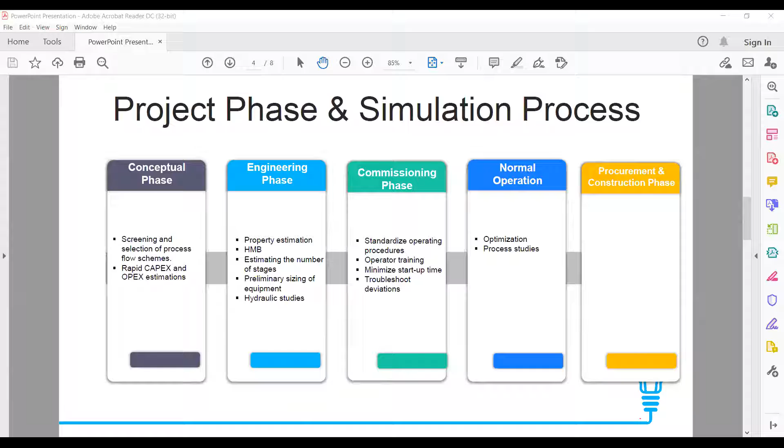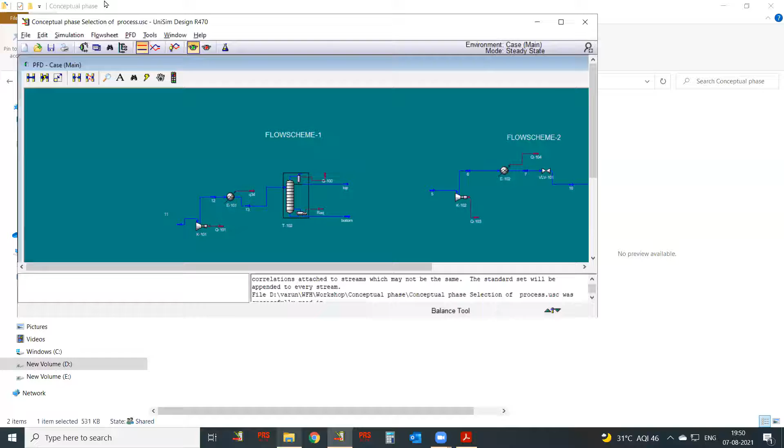So in the conceptual phase, it really helps. Actually, what I want to insist is throughout the lifetime of a project, the process simulation helps us. So right now we'll see one application for a conceptual phase. Yes.

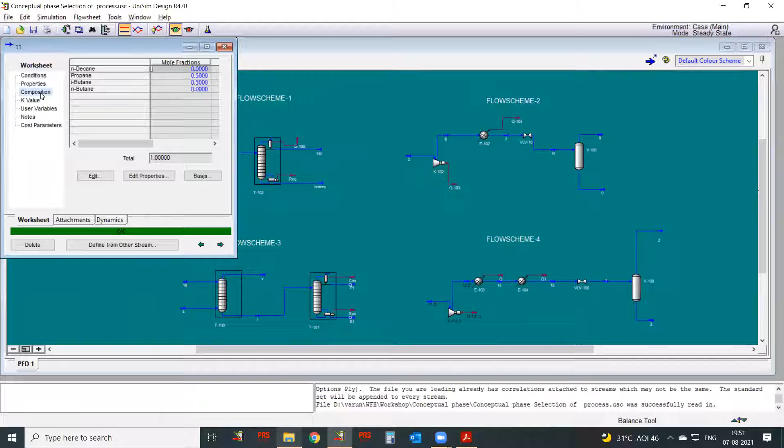So we have a propane and iButane stream, and probably you want to make it better. You want to make a stream that is say 70% of propane, split it. So we have 4 different flow schemes. So one is compressor, a cooler, put it in a distillation column, separate the propane and the butane streams.

The other one, you have a compressor, a cooler, and an expansion valve, put it in a separator and split the streams. Flow scheme 3, we have an absorber. We can absorb the butane selectively using some absorption media, some solvent, and then separate the solvent, purify it and recycle it back and recover the propane part.

Or flow scheme 4, you do the cooling in 2 stages. So one at a higher temperature, the other one at a much lower temperature, again taking it back and splitting it in a separator. So we have 4 different flow schemes. So which one is better? So from a capex perspective, from an opex perspective, we can do an analysis of the utility cost, the sizes of equipment, and decide on which flow scheme would help us better.

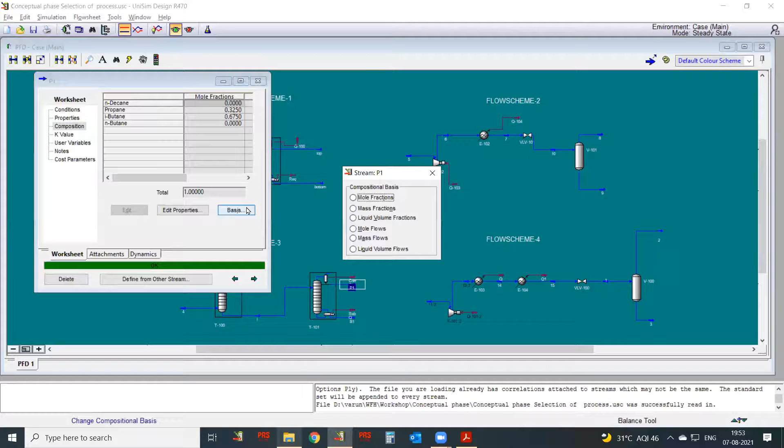So each one will have a different capital cost, different operating cost, and sometimes different purities as well. For example, in this scheme, you get about on a mass basis 66% of propane. This will be much better, I believe. No, not really. This, yeah, the same 66%. 67. So small changes in composition, but the equipment configuration is different.

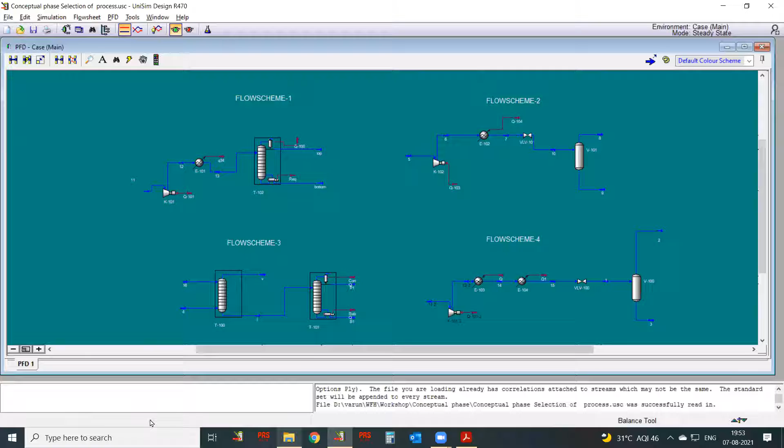So in a conceptual phase, chemical engineers face situations like this. So we can really use the process simulation tool to help us to find out which flow scheme would be a better choice. So this is about the conceptual phase application. During the engineering phase, we face even more challenges. The engineering phase is where the process simulation tool is put to its maximum use, or we derive the maximum benefit.

So first one is the property estimation. As you all know, if the properties are right, the sizings are right. So the correct properties will give us the better sizing and accurate performance. In the engineering phase, it's rather difficult to estimate properties from lab data or retrieve it from standard textbooks or data books. So process simulation software can find out properties at different pressure temperature conditions using different thermodynamic models, and those numbers are pretty accurate.

Let's see one application for that. Let's work on a water stream. Certain properties are quite clear. We might know them, right? So we're talking about water at 30 degrees and a pressure of 2 bar. So here we get a lot of properties. So right from densities, enthalpy values, heat capacity values, viscosity values. So you get a lot of properties for pure components.

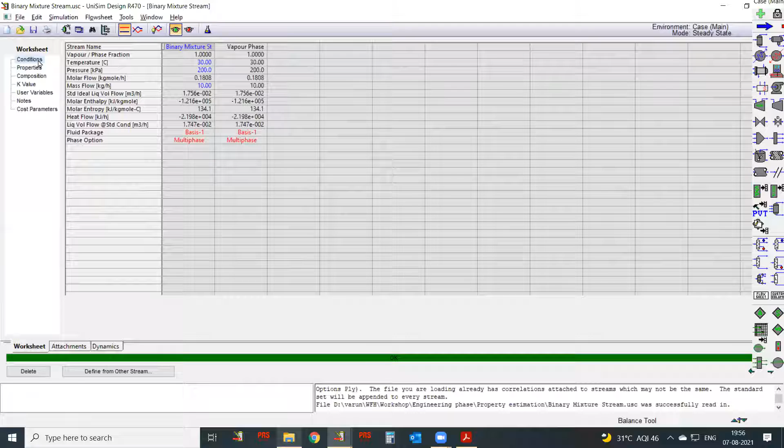So these are very authentic data which can be used for the sizing of equipment or when you are doing a calculation. So when we have mixtures to handle, this is a stream of propane and butane. When you handle mixtures, properties are even tougher to calculate, but the software does it with much ease, and the numbers are again authentic and accurate.

And then sometimes we might have situations where we do not know the composition, say like crude oil. We do not know what components are there, or even with vegetable oil. So when we do not know the components, the software gives us an option to simulate the stream using hypo components. So in this case, it blends a lot of hypo components, resulting in whatever parameters that we plug in when we... one second.

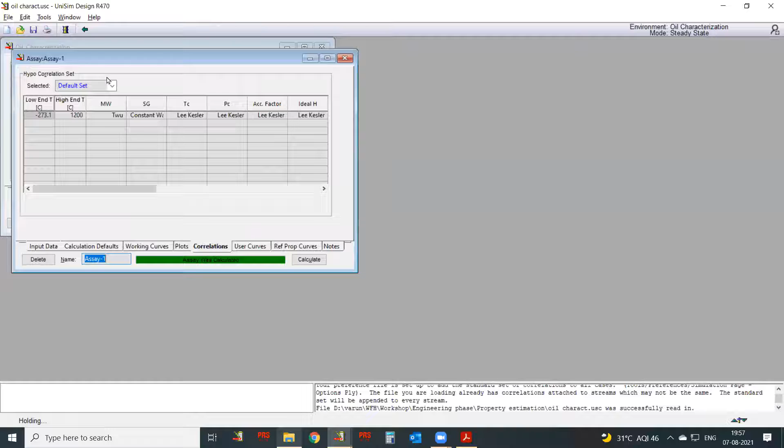The bulk properties we try to match. Say I know the crude oil has a molecular weight of 300, density of 783.3. I know certain viscosity data, and then I know the light end composition, because these are easier to determine in the laboratory. So with these minimal data, we can really create an assay, which means the assay is a lot of hypocomponents put together, but put together, they meet the input that we have given.

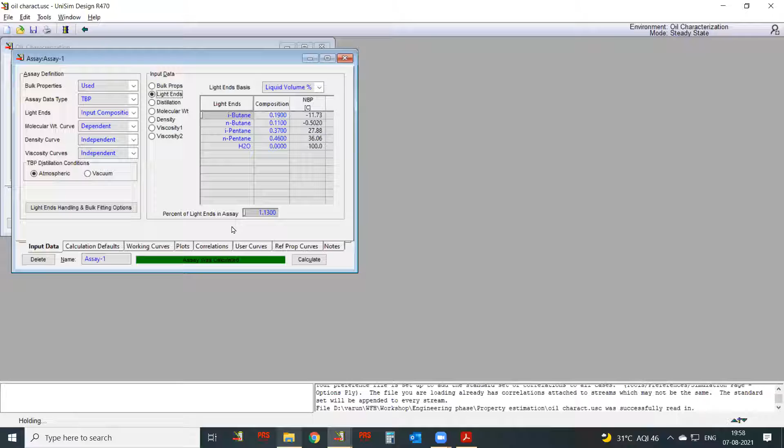That means the software identifies the hypocomponents and assigns certain quantities, mass for the stream, with a composition such that if you put them together, you get a molecular weight of 300 and whatever density you have specified. So we can use the tool for property estimation, not only for pure components and mixtures, but even for hypocomponents or streams where we do not really know the composition.

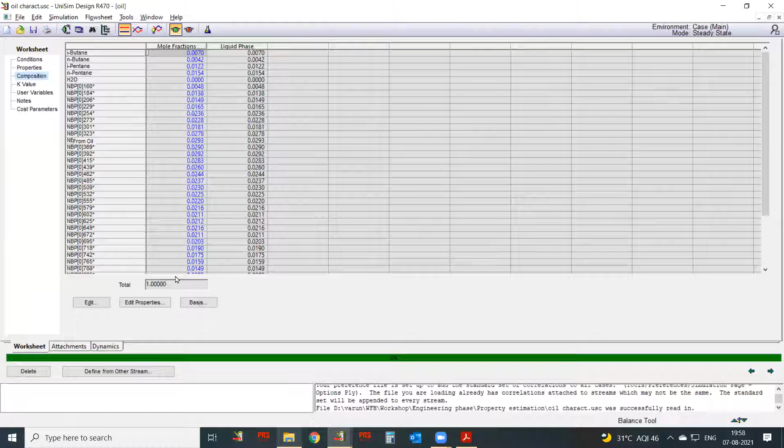So here it has blended several hypocomponents so that the property value that we have given matches. See, the molecular weight is 300 now. So it really helps a lot to model systems where we do not really know the composition and the components. So this is one area where the software helps us a lot.

We can do HMB, heat and mass balance. This is one routine application for the process simulation software when we want to do a heat and mass balance, which as you know is the very basic process deliverable. So we can use the process simulation tool. This is a propane refrigeration loop. You can see the equipment configuration and the temperature and pressure conditions at each and every location.

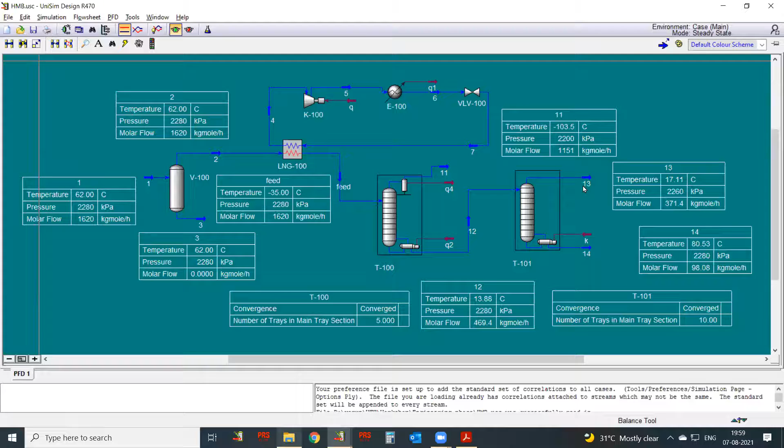So we can also add a table here. Okay, so the table is going to show us every stream, the temperature, pressure, mass flow, heat flow, and all that. So a PFD with stream data can be easily generated using a simulation tool.

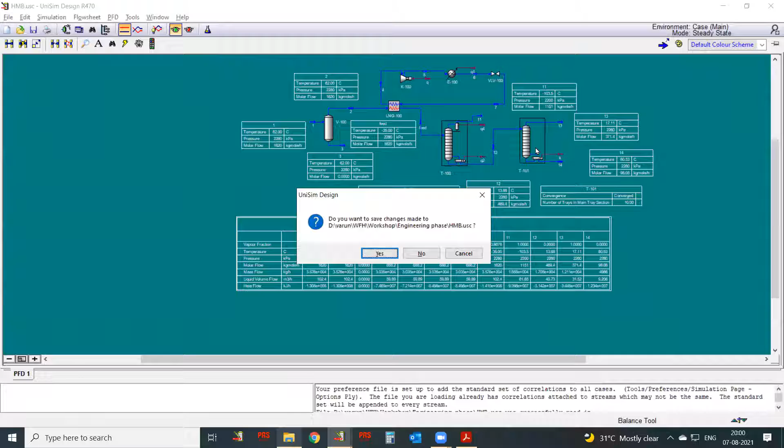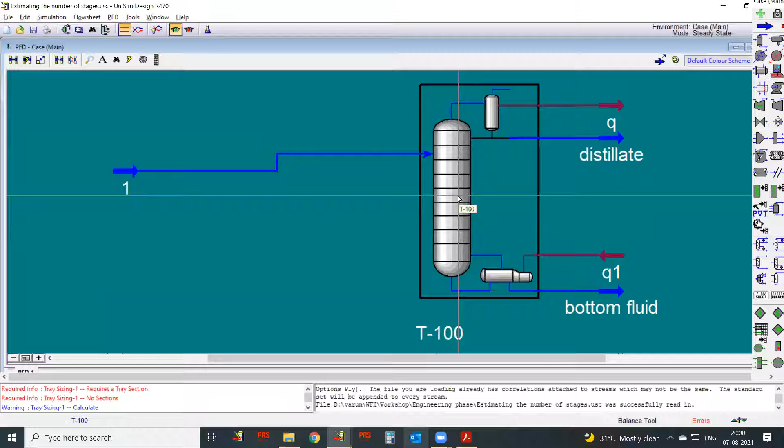And another critical area is estimating the number of stages for a given separation. So let's try one here. So we have a column here. The feed is benzene and toluene, and we are expecting a purity level of 99% benzene. Okay, so we want to know how many theoretical stages are required. Okay, so this is where we do the simulation.

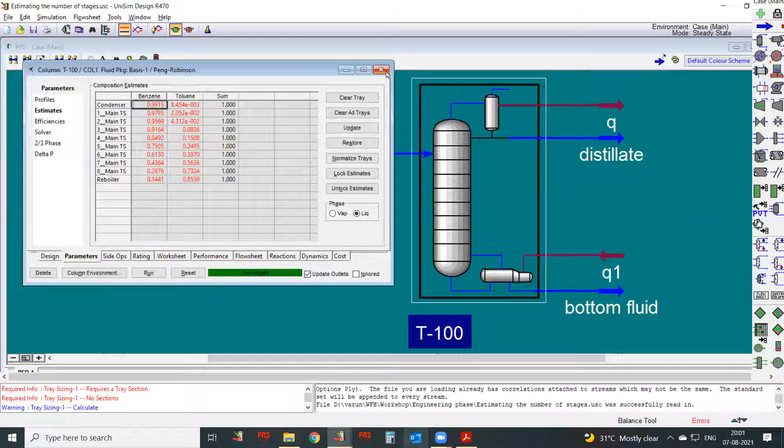We can fit in the requirement in this page, and then we can find out that we require about 8 theoretical stages at these given pressure conditions, and it also gives us the temperature profile, pressure profile, and also an estimate of the composition in each and every tray. So this is critical information for the column vendor. These outputs are given to the column vendor, so they do the column hydraulic sizing based on this.

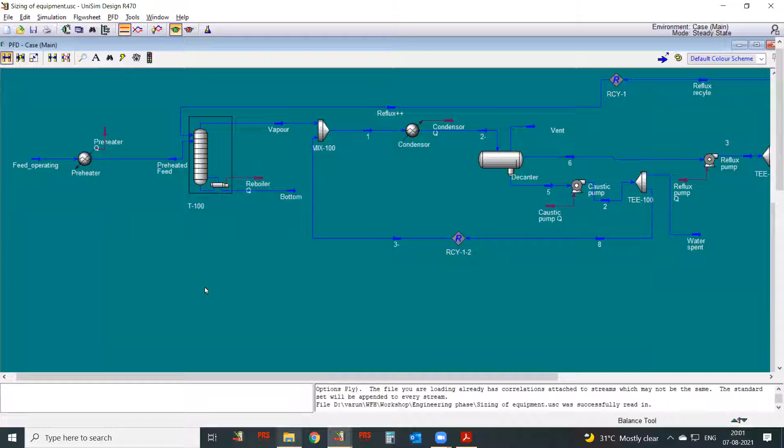And during the engineering phase, we can use the simulation software for preliminary sizing of equipment as well. For example, we have a distillation column again. So we have a column here with a supporting overhead section. We can do a quick sizing of the column, and it says that the section diameter is 1.5 meter. So for this feed rate and operating conditions, we need a column of 1.5 meter diameter.

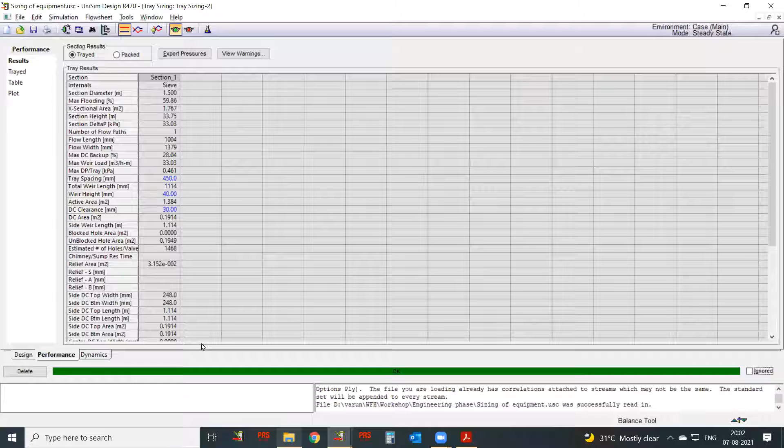It predicts the flooding limits and many other parameters relevant to a column. So preliminary column sizing can also be done using the simulation tool. And finally, we can do a lot of hydraulic studies. Hydraulic studies are about pressure drop calculation.

Currently we are doing one project for a company in Hosur. They have a very complex network of a thermic fluid system, and they find it difficult to estimate the pressure requirement at the pump. So we are helping them by doing a hydraulic study. So these are typical application areas in the engineering phase.

Now we move to the next phase, the commissioning phase. In the commissioning phase, we can really make use of the tool to standardize operating procedures. We can virtually start the plant. Once we develop a dynamic model, we can virtually start the plant, shut down the plant, and then find out whether at any point of time we are deviating from any design limits.

So we make sure that standard operating procedures don't exceed the design limits. So the software can really help us predict and then help us to evolve the standard operating procedures. It can be used for operator training.

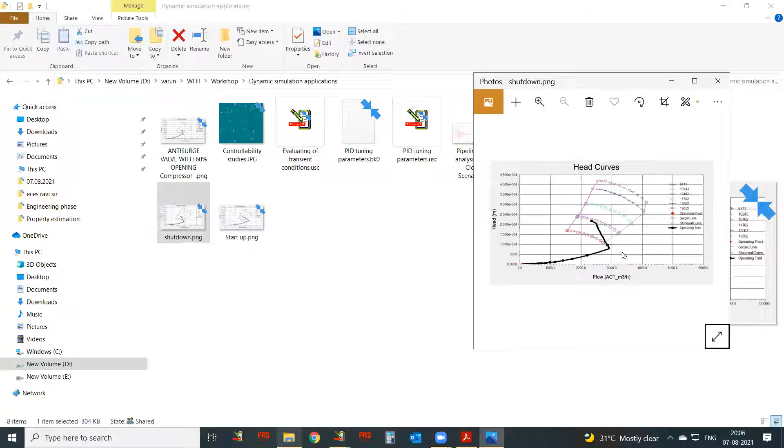Dynamic simulation. So let's see compressor startup. So a compressor has two limits called the surge limit and the stonewall limit. So the black line is the operating trail, right? The operating point from a static condition when you roll the compressor on. So it moves on, it crosses certain flow-head combinations, and then you can really see from this image that this compressor has gone into the stonewall limit.

The gray one on the right border is called the stonewall curve, and the pink line on the left is the surge limit. So we can see that if we follow this track or this startup procedure, it violates the stonewall curve. So let's see one where it has been done properly. This is much worse, right? Let's see one more.

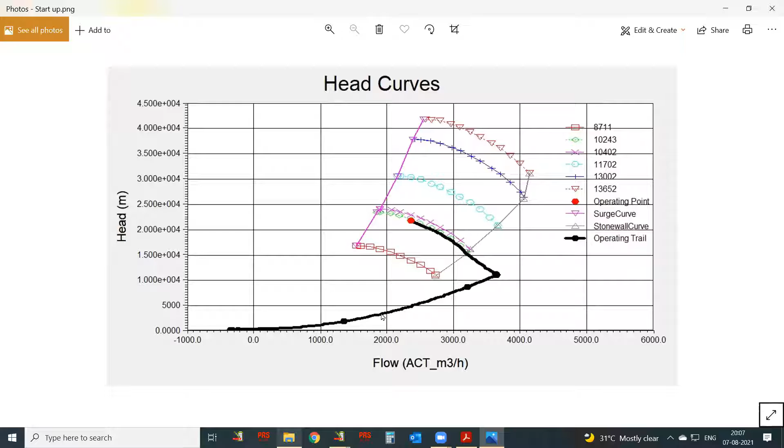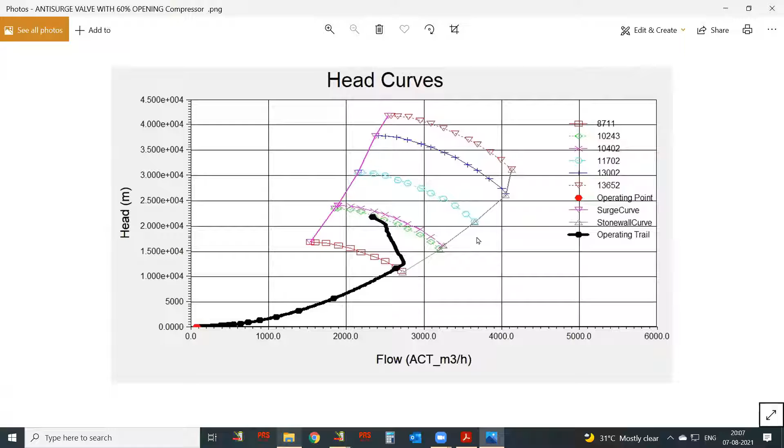So we tune certain control valves, and then here you really see the operating curve quickly reaches and operates within the limits of the surge curve and the stonewall curve. So we can really save a compressor if this study is done beforehand.

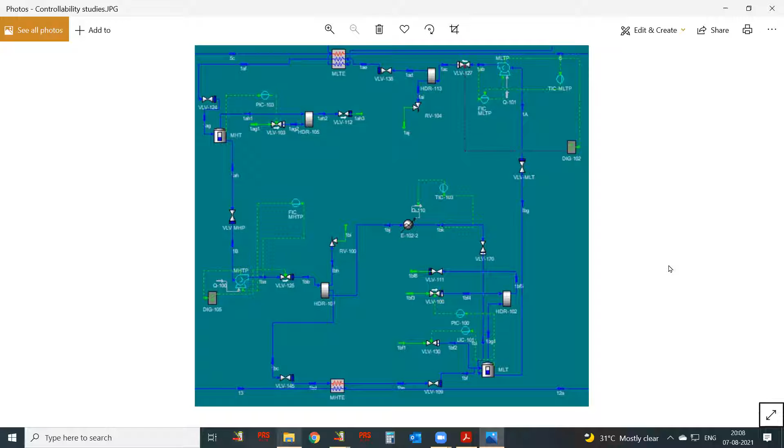So we talk about controllability, the pretty big picture. So we have the very big flow sheet that we developed for the company in Azerbaijan. So there are a lot of controllers put in, right? So we did several trial and error runs connecting this parameter with that parameter, and then we found out which control scheme would make the system work better, help in startup and shutdown. So for controllability studies also, we can use the software.

And this is another application. It's called pipe surge modeling. So the background is, if you have a line through which a liquid flows and suddenly somebody closes the valve, it's just like applying a sudden brake on a moving train. The train derails. The same way, the momentum energy transfers to pressure energy, and huge surges in pressure are seen. So this is called the pressure surge.

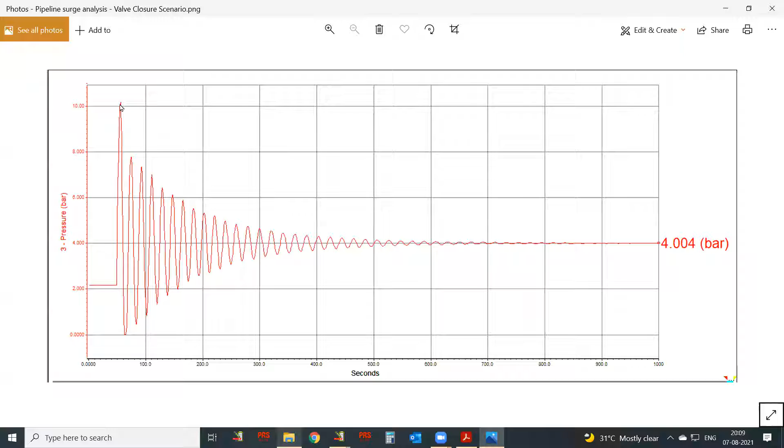If you see, the line was operating at around 2 bar only. It has reached 10 bar instantaneously just because somebody closed the valve. So now, if the design pressure of my piping is not that high, then we may have to modify the process so that the design limits are not exceeded. So a pressure surge study can also be done using the process simulation tool.

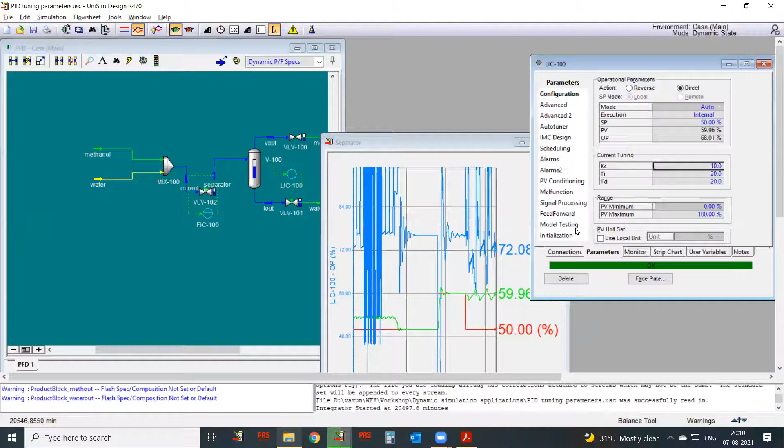This is PID tuning. You can see it live here. So look at the screen here. So much fluctuation in the blue line, right? So the controller is struggling to maintain the level in the separator, right? It's moving up, down. It's because of the wrong PID values, tuning parameters. Now, suppose we change the tuning parameters.

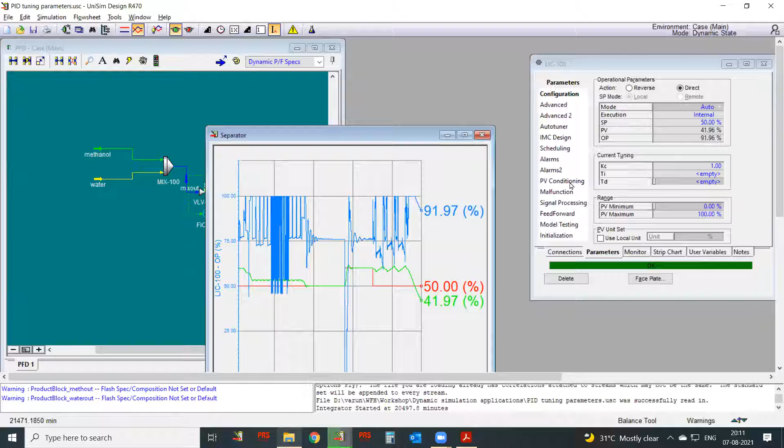You'll quickly see that the flow tries to stabilize. Doing it in a live plant is very, very risky. So optimizing the PID parameters is done offline in a dynamic model, and once we do this, we take these numbers. So right now we changed the three values here. KC stands for the proportional, TI stands for the integral, and TD for the derivative. So we removed the integral and derivative because it's a simple separator level control, and a little offset here and there is not going to matter much.

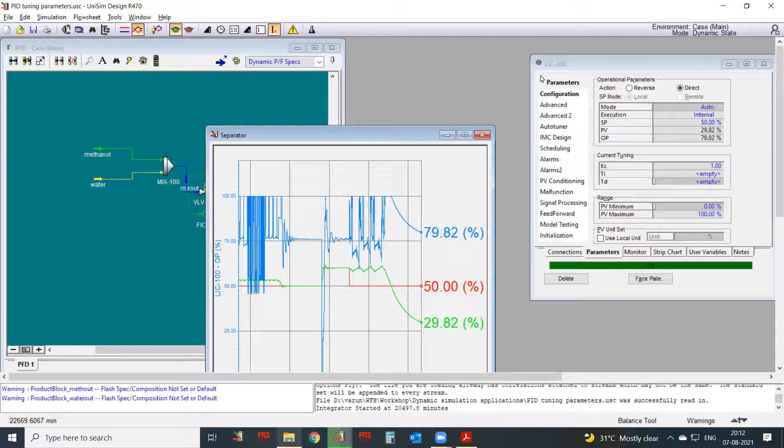So we just tuned the controller using only the proportional constant, and you can see that the fluctuation really stopped. So when we have, say, hundreds of controllers to tune in a live plant, it's going to take a lot of time, and sometimes you can really upset the plant. So if you don't want to do that, we have a dynamic model built, and we find out the parameters that would work, and most of the time these numbers are going to work perfectly in a live plant. So this is one area.

And then, this was one project that we did for a company here. It was an ethylene oxide unloading scheme. It had a requirement of bringing down the cargo. The ethylene oxide is brought at a higher temperature, but the requirement was it has to be brought to a lower temperature within a certain time span that was specified by the client. So the requirement was to find out what would be the duty of this. Calculating it manually is a little tedious because every time the inlet temperature changes.

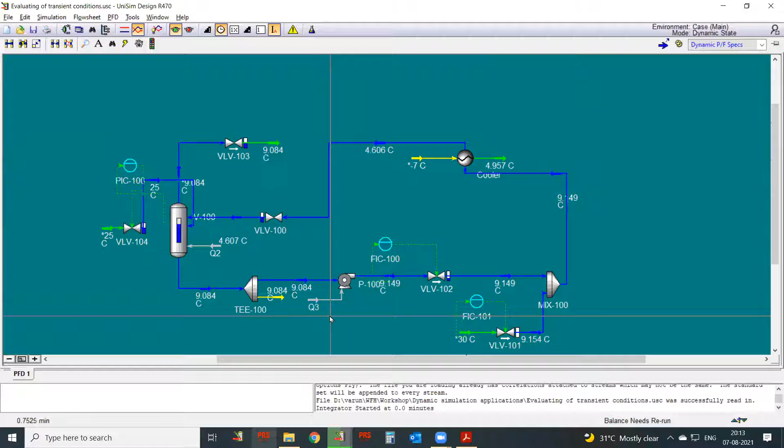So when this scheme is on circulation, every pass it takes through the heat exchanger, the temperature drops. So eventually the inlet also changes. And added to that, you have unloading going on, consumption going on, several parameters affecting the dynamics. And still, if you want to accurately estimate the duty requirement or size the heat exchanger, we can do a dynamic simulation and then get data from that. So dynamic simulation finds several applications. We have done several projects on dynamic simulation. Many live plant issues we have worked on using dynamic simulation.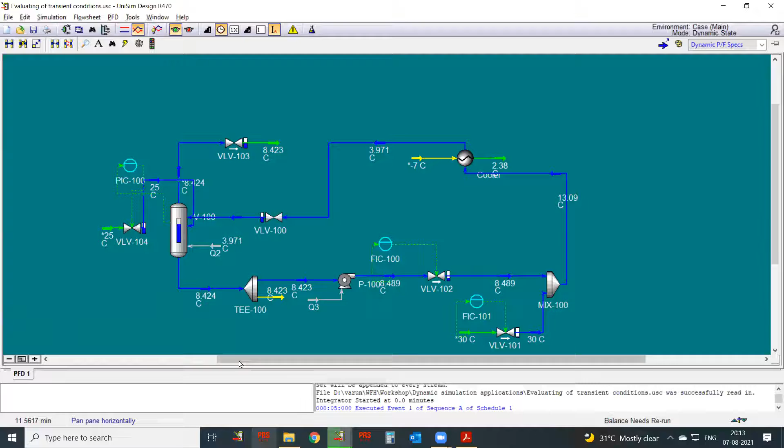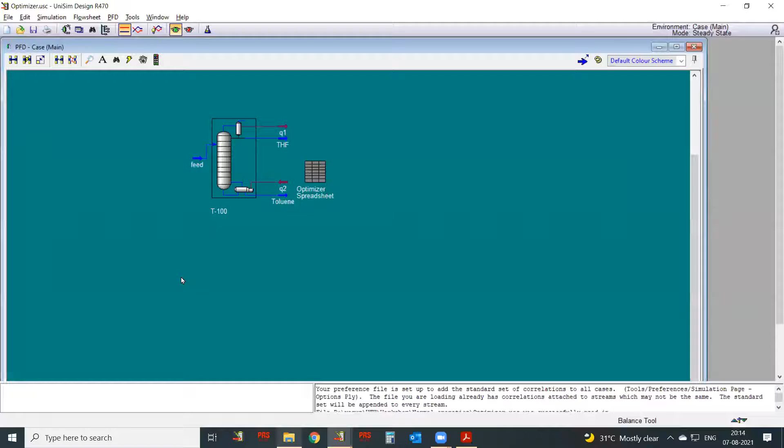And then we can even do plant optimization studies. Let's see one demo there. We have a feed of, it was a textbook problem only, tetrahydrofuran and toluene, and we are operating at a purity level of 99% of THF and toluene, and then we built a spreadsheet here, finding out the cost and the profit. So cost is the feed cost. Capex is not done here, but the operating costs, the feed cost, and the reboiling and condensing utility costs have been added. And the revenue is from selling the overhead product and the bottom product, that is THF and toluene.

So as we all know, higher purity will fetch a higher price, but getting higher purity will result in higher utility cost. So what would be my optimum? Right now we have converged this column based on 99% purity of THF and toluene, and you can see that we are just making about $2 per hour with this processing condition. Now, we can run an optimizer, it has been pre-configured, so we just tell the software: change the purity between 0.9 and 0.99. I'm happy with any purity value within this range, but please try to improve my profit. Maximize my profit. So this couples the simulation with the spreadsheet, and then we say start.

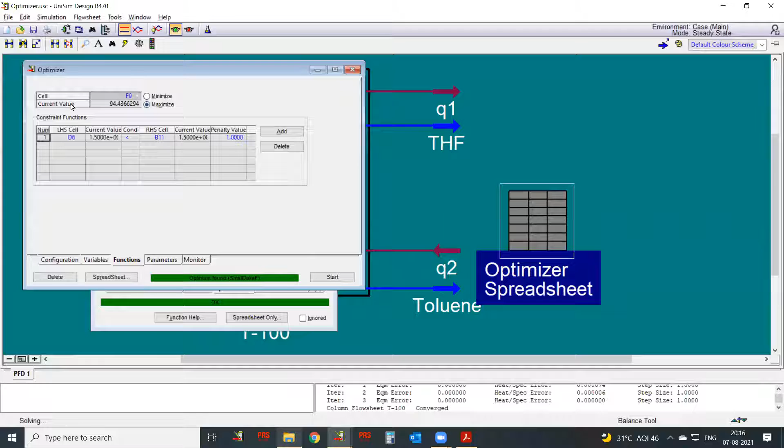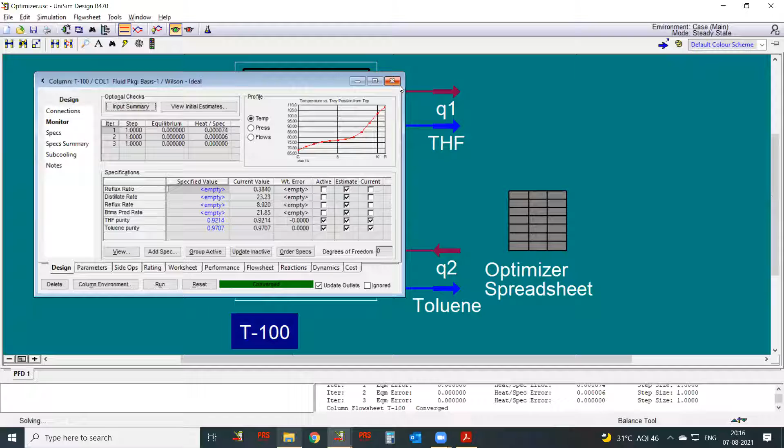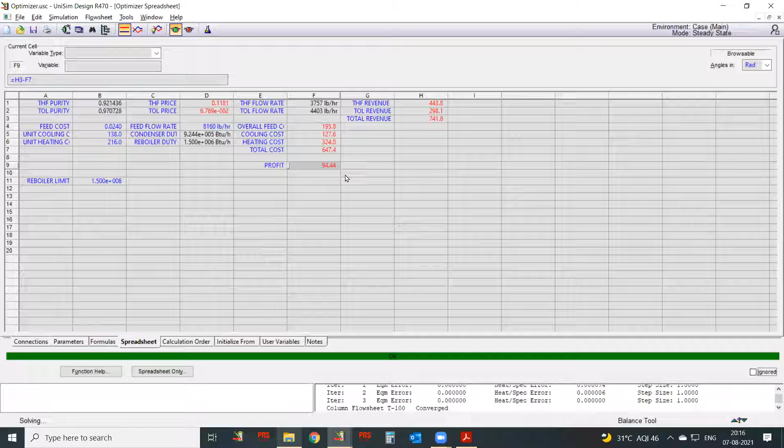So see a huge jump in profit now, $94 per hour, from $2 per hour, which means we are running at a much sub-optimized level right now. Though we compromise on purity, it's 92%. The software says that if you target an overhead purity of 92 and a bottom purity of toluene at 97, given your price information, this would be the best operating point where you can make a lot of money, $94.4 per hour instead of $2 per hour. So we can have an optimization also run along with the PFD.

So we completed. Okay. So we'll go to the presentation. Yeah.

So we can do a lot of process studies as well, right? We don't have a model here, but one study we did for Qatar Gas was a column fluctuation during a bed changeover when they had an adsorbent vessel. So when there was some feed stream that was switching on, right, the downstream column would fluctuate a lot, and the pump would starve, and then they were facing a lot of mechanical issues.

So there was a proposal from UOP for mitigating this. So they wanted to inject a limited quantity of paraffin into this and see if it would mitigate the fluctuation in the column level. But they wanted to try it out in the software before doing actual implementation. So we did the modeling for them, and then we confirmed that the level fluctuation would stop. We found out the revised operating conditions for the column, and that was quite successfully implemented as well.

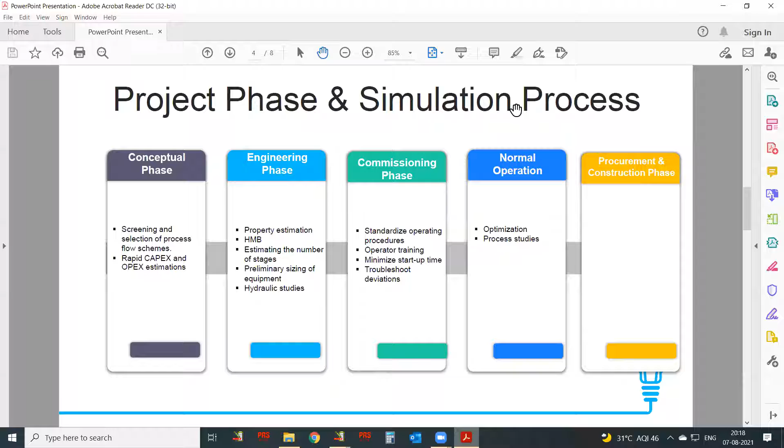So it's like a backbone where we can use it throughout the lifetime of a project. So this we have seen already. We can use dynamic simulation for startup and shutdown of the plant, modeling it, finding out if we are exceeding the design limits. We can evaluate transient conditions. For example, I'm switching over feed from grade A to grade B. How long would it take for the overall product to reach its earlier purity? I have a feed upset. How long would it take to get normal?

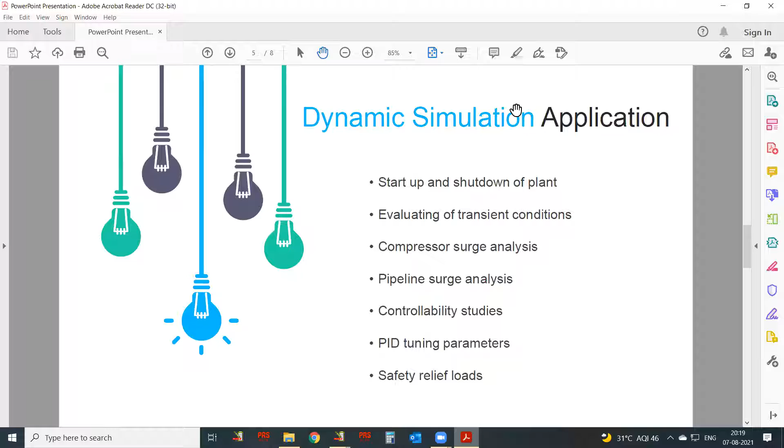Or even for safety valve studies. So when my reflux control valve closes suddenly, what is the column relieving load? So those are transient conditions which can be modeled using dynamic simulation, and then taken into a safety valve sizing tool, and then we can size the safety valve. We've seen compressor surge analysis, pipeline surge analysis, controllability studies involving the use of cascade controls, or overall controllability of a flow scheme. And then we also talked about the PID tuning parameters. It can also help us to arrive at the safety relief loads.

Okay, so that brings us to the close of this presentation. So, if you're new to the tool, we suggest that you learn the software. It really helps a lot. It makes understanding chemical engineering very easy. So we can just play with the numbers and see how things get affected, or what parameter changes what to what extent, right? So if you already have the tool, we encourage you to use it, explore it, because there are lots and lots of options. Every day we learn a new thing when we try it out in the software.

Right now we are working on a stabilizer column for a plant here. So we are trying to match the PFD data. So everything is a new learning with the software. So you can contribute to this process, right? If you know an opportunity where you think a software can help, we can work with this. So you can also do case studies and then share it among the community, and also you can collaborate doing live projects.